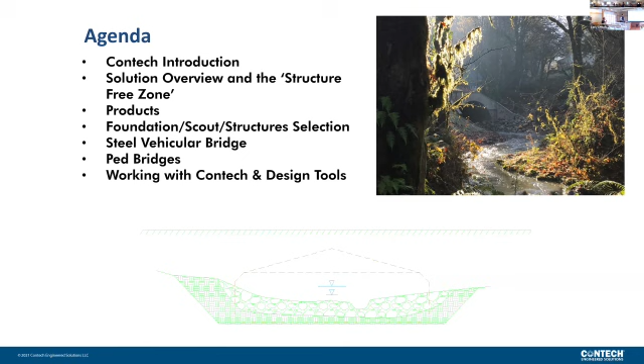All right, so structure free zone. Especially for Washington, for probably the last 10 years, we've really struggled. A lot of people do design-build, or a portion of it, but it's usually around a box culvert, a stream crossing, and it's up to manufacturer or contractor design. And so we really try to help hone in what that structure free zone looks like. How deep do we need to go for scour? Where do we need to put the foundations? How wide does it need to be for fish? Do we need some clearance for inspection, future maintenance?

So the more we can get that defined, then we can start looking at, okay, can we fit a plate structure in there? Or maybe it's precast. In this case, it's an arch. Maybe that's a precast three-sided structure. Or maybe a regular conventional concrete or steel girder beam span is the right option? I don't know. And a lot of people ask me, we were talking cost earlier.

I don't know until we really start looking at both the material costs of what Contech may supply or manufacturers, but then also what are the substructure, what are the foundation costs? And really that's the big picture that I try to pull together.

I do get a lot of emails from people: can you provide me a list of these 4 or 5 different costs, I just want to compare material costs? That's not the rest of the story. And that's why I encourage people to really look at the whole rest of the story, because just because it's the cheapest material, it's not always the cheapest constructed and also the long-term most cost-effective solution. Okay.

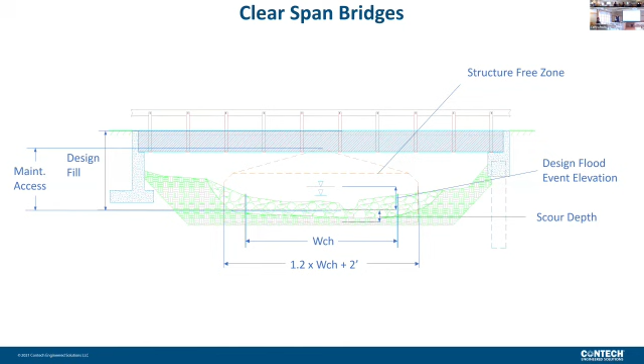So we do have at Contech a lot of different types of bridge structures, starting with small diameter culverts. We manufacture culverts for Washington up in Arlington, down in the Portland area, or over in Eastern Washington. We have material manufacturing all over the country. I'm really not gonna focus on those.

We'll really stick to what we call structural plate. I'll touch on the precast a little bit. And then I'll focus more on the beam span bridges. So I just tried to pick out what I think you guys are probably gonna look at most often. We're gonna look at a lot of huge DOT crossings. I'll show a few concepts as we go over. So we'll go back to that clearance box.

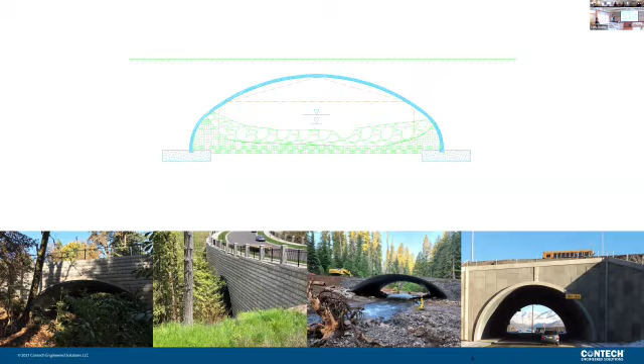So plate structures. Who's familiar, if I just say plate? Everybody familiar? Anybody not familiar with plate? Thank you. Perfect. I appreciate the honesty because it really helps knowing how fast I go or not.

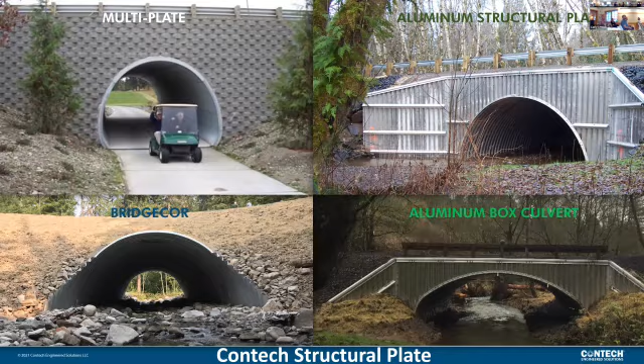So when we say structural plate, basically what we're talking about is the steel or aluminum plate structure that makes up a shape. So we have multi-plate, which is up on the upper left, aluminum structural plate, BridgeCor, and aluminum box culverts. A couple different products. So what are all those and how do we really decide what to use?

So probably the first thing that I hear a lot from a county or the city or a lot of the engineers: I can't do a steel structure, it doesn't last long enough. We're tearing out this old culvert that's corroded in the bottom. And I don't disagree, but a lot of those structures were probably installed 50 years ago and met the design intent at that time.

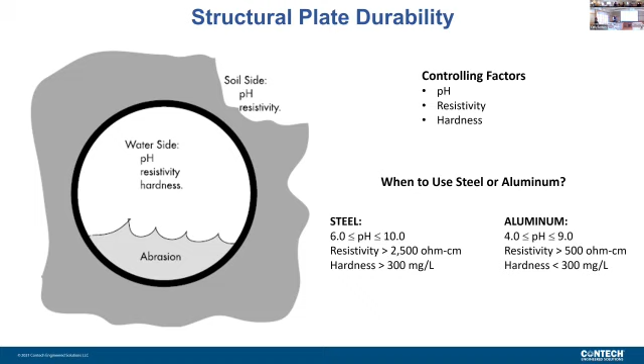And so one thing to consider is, back in the day, we typically would just install that culvert right in the bottom of the stream, we wouldn't countersink it or do anything. And then we have abrasion going through the invert. Once you lose the galvanizing on a steel structure, yes, it's going to corrode, especially when it's a very thin gauge material. I don't see that to be the problem anymore, because really what we're going to do is typically bury those structures.

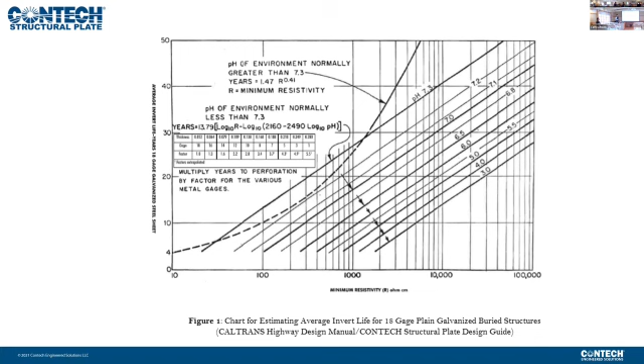But here's a great chart. This came out of Caltrans, and basically they inspected thousands and thousands of those galvanized steel culverts, smaller diameters, and put together this chart. You have resistivity on the bottom, and on this axis you have the pH. So if you go through that, let's just assume 28 years for this one. But that is for a thin gauge material.

And so what we do is we use this chart here to factor it up, because the lowest gauge that we make is a 12 gauge structure for structural plate. And in this case, you can say, instead of going 12, I'll go 10 or 8, and then you can increase that service life.

So my big takeaway to engineers is, let's understand our site, let's understand the materials and design it appropriately. And I think that's what we can really show for a lot of the sites within Washington. If we don't have hot soils, we can show a galvanized structure will last 75 years. Typically 75 years is what WSDOT, any of the state agencies, we need to design to as engineers. Does that make sense?

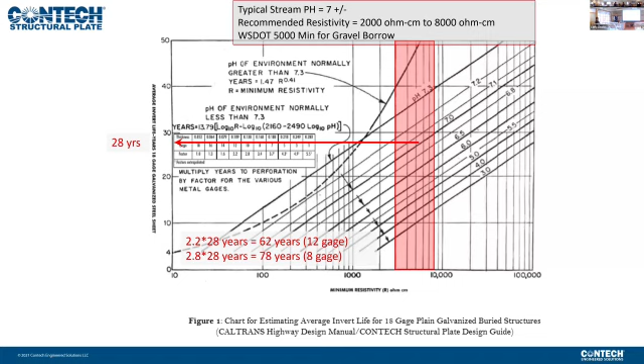The other option is we could go to an aluminum structure. Aluminum structures just have a broader pH and resistivity range from a durability standpoint. And so this chart here shows what we were just looking at, but in more detail: what are those thicknesses? So you see how this goes thicker and thicker.

So we can really get some material that is very thick, from a durability standpoint. So I'm gonna start passing this around. So this is what we call BridgeCor, and this is galvanized steel. What a lot of people used to be familiar with was multiplate, which has been around for about 100 years, and that is the 6x2 corrugation here, both of them galvanized steel.

And then the BridgeCor is 15 by 5.5. It's really the difference of those two. I kind of relate it to building a deck at your house. If that deck needs to span 4 feet, we might be able to use a 2x4 to span that distance, but if we need a deck that's going to span 10 feet, we're going to use a 2x8 or a 2x10. It's just a much deeper material, so we can span much further.

Okay. So I think that's probably the biggest takeaway that I've had over the last 10 years: BridgeCor has really opened the opportunities to different shapes, much larger spans, deeper fills as we do more and more of these stream crossings.

Okay, the other option would be going to aluminum structural plate, and that's a 2.5 corrugation. What's really cool about aluminum structural plate is it's very lightweight. So these are aluminum bolts, and then there's a steel bolt. Now, typically, we don't supply aluminum bolts with aluminum plate. It's not that we can't, it's just for AASHTO, it's not a requirement. So if you have a project where it is, I would make sure it's very clear in the specifications.

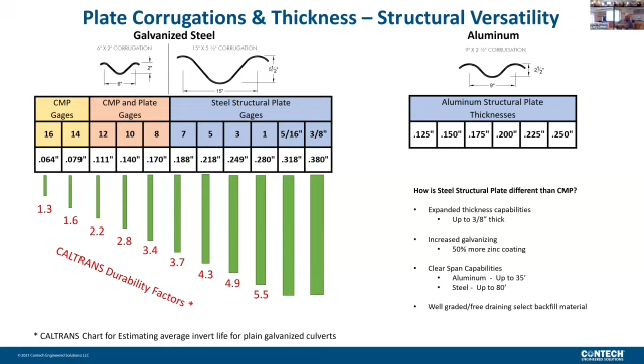Okay. We have a ton of different shapes, I shouldn't say we, but the industry. A lot of people are familiar with what's called the structural plate design guide. In the front of it, this basically summarizes the tables in AASHTO, so that engineers like us can go in there and go, okay, what's my span, what's my rise? Is there a structure that can meet the requirements of a road? So if you guys don't have one of these, let me know. I have a couple copies, but I can also email the PDF.

And so why do we have all these different shapes out in the industry? Anybody? Clearance box. Look back to that clearance box, and either it's a clearance box or it's a wide span, but I don't have a whole lot of fill height, so I'm gonna go to a culvert shape. Or maybe I have a lot of fill height, and I need to go to a single radius arch because I need to be able to carry that load. I couldn't carry that on this really flat structure with a lot of cover, okay?

This one here actually fits in AREMA, and AREMA is for railroad, so we can drive a train through this one. For structure-free zone, that's a lot of what we do in the industry, and that's the first thing I look at when people ask me. I go, well, what's the distance from your stream to the road, how wide is it, and how deep do I need to make that? Okay, and then we start looking at different shapes.

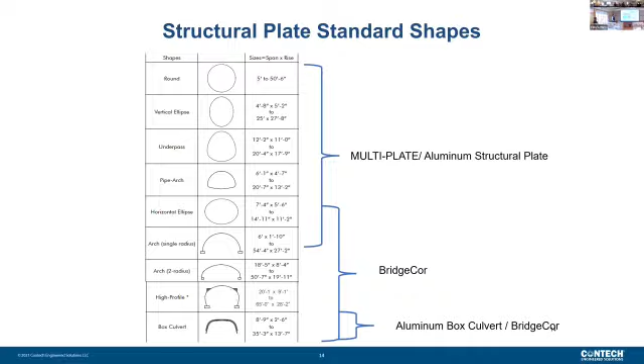Okay, so why do we a lot of times use different structural plates? A lot of times it's lightweight and easy to construct. The majority of the time, we don't need a crane out on a job site, it can be done with lightweight equipment. If it's aluminum structural plate, I can actually pick up some of our smaller aluminum structural plates. So if I can do it, most of the contractors out there can easily pick them up.

Some of the end treatments that we see, these are one of the bigger things that I started seeing on your guys' projects: what's happening at the end of the structure and what's most cost effective for that site and simplest for the contractors. Are we doing a structure that's up in the woods? Or is this down in the city? Those are the different things that we need to think about.

So up here, this one's for Mason County, this is aluminum structural plate headwall and wing walls. We can also do those out of steel. On the right would be a beveled end section with a cast-in-place concrete collar. I usually encourage that we try to stay away from cast-in-place if we can.

What I would rather see is almost that structure extended out. From our perspective it doesn't matter, but from the contractors and the questions I get about trying to cast concrete up and around structures, if we can just square end that structure, it's more cost effective. But there are safety reasons and other reasons why you might want to do a slope collar or bring in more line.

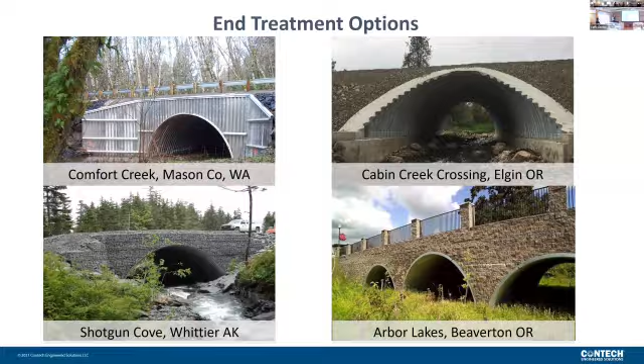The other option is going to some type of wire-basket wall or just doing a precast keystone block wall or something like that to keep that structure short. All right, so I'll flip through these pretty quick to show the different structural shapes and the different designs that were done.

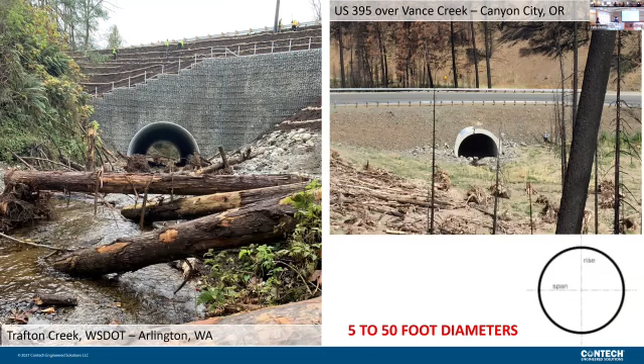So again, this one's a 26-foot round structure that we did for Washington. What's unique about that one versus a precast is it's more cost effective, but it also handles almost 50 feet of cover. That's what we're seeing on a lot of these projects. Ten years ago, we did all the easy ones. Now we're getting into harder and more costly crossings, and we really have to look at what we're doing and how, and it does cost more.

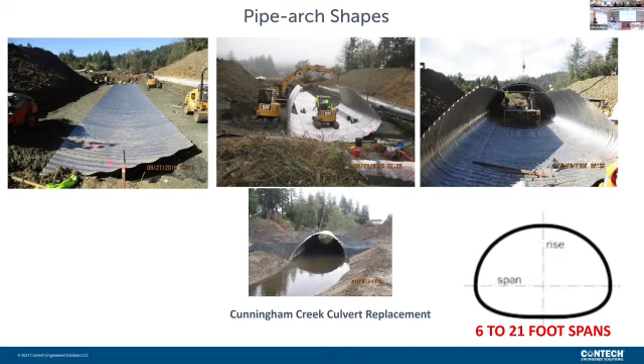I also really like the pipe arch. Great shape. We're not excavating too far, but still backfilling that structure, with that fish rock on the inside. The other one I see more often, I know these are just regular pedestrian crossings, these could be animal crossings. But when we go to this underpass shape, what I really like is the ability to get equipment in there and build that stream.

So I really encourage you as engineers, from what I've seen with contractors, the more room they can have, yes, the structure might cost a little more, but if they can get hydraulic equipment in there, it's way easier to build that stream. And ultimately, who's going to be maintaining the stream in 20 years? If something gets caught in there, can you get that woody debris out, does it pass through or not? If you need to do maintenance, having that equipment access matters.

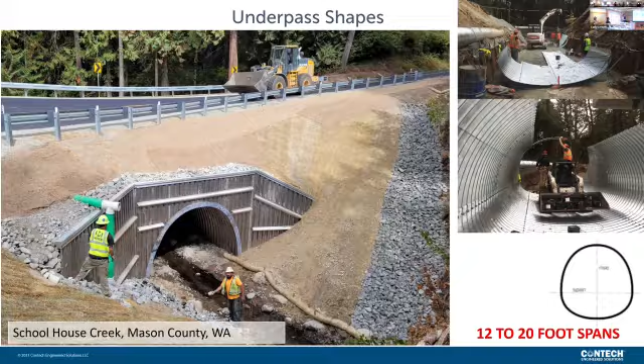Regular box culverts, we can do these out of aluminum or steel. If we're struggling with the distance from the stream to the road, a box culvert fits great to get that long span. But typically, especially the aluminum box culverts, they can only handle 5 feet of fill to meet AASHTO. We can design it for more fill, but AASHTO's requirement is no more than 5 feet. We can also go to the galvanized steel BridgeCor, and then we can handle more cover. But that's where I go: if we have more cover, let's change to a more structurally efficient shape.

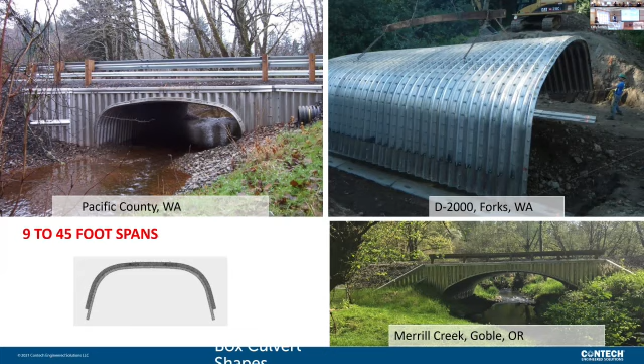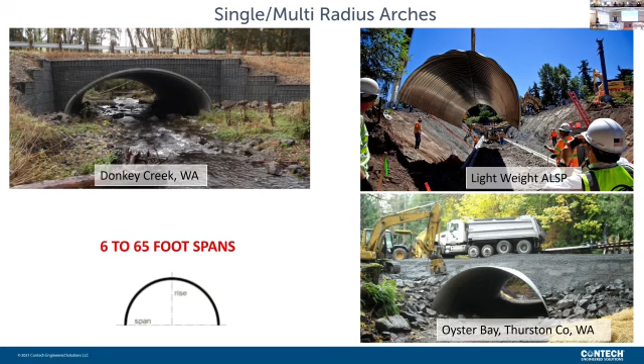Single radius arches. This is a multi-radius. You were asking me earlier, can we do different radius type arches? We definitely can. We'll do a single radius, which is the two on the right, or multi-radius, which just means here's one radius and there's another radius. We can do three radiuses if we need to. So I'll show you a couple different shapes. This is one for Washington.

The other thing I look at is, just because it's not in this book doesn't mean we can't do it. For example, this structure we're looking at right here does not show up in this book. The biggest span in here is a 23-foot span. This one's a 28-foot span. So that's where you just contact us.

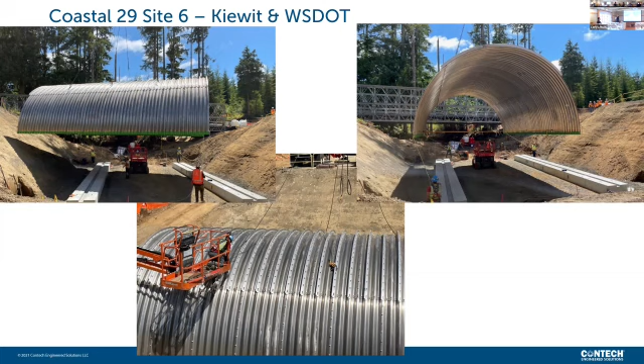If you said, can we do a 60-foot span? Maybe that's getting outside of the realm. But this is where we have that clearance box and know the project requirements, and we can say, here are the different options. So this is the end structure there. And if we take that, next year we're going to do a 42-foot span.

So in Contech, I almost double the span of what's in this book. But we're engaging, us as engineers, you guys as engineers, and we're modeling it and making sure it works structurally. And then it's cost effective.

The one there on the right, originally for WSDOT, that's a precast structure. Contractor, this is way out on the peninsula. Let's try to save some money, try and get the cranes out there, cast in place concrete, everything gets covered up wherever we get from the cities. Okay. And we've done a couple of plate structures with them, and so that's where they really said, hey, can we make an aluminum structural plate work? We think it's far more cost effective.

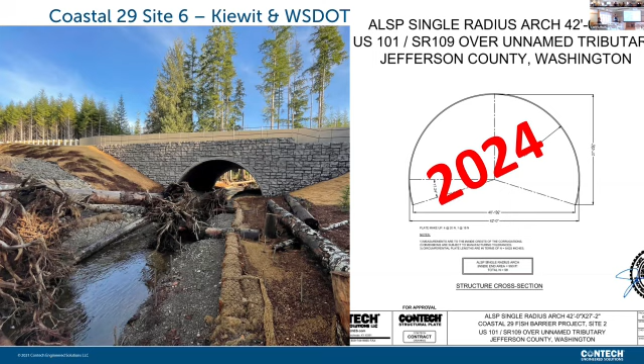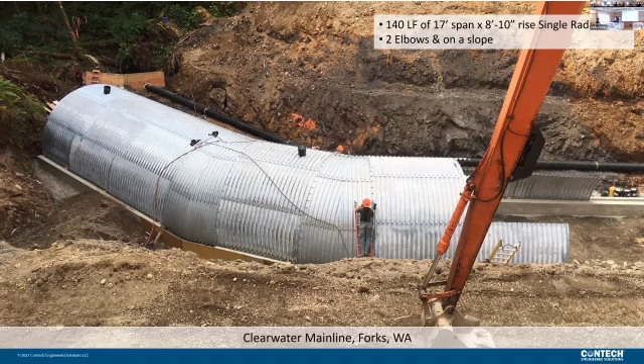Okay. The other thing that's great about some of the structural plate is being able to do elbows. So this is one job out by Forks, but being able to follow that stream, and so we already have an existing culvert, maybe there's an elbow in it. Instead of straightening this out, making it much wider, more cost effective, really follow that stream. Obviously when you see your rock, it makes it harder and harder to excavate through that rock.

And this again was my picture too that I talked about earlier. We get that hydraulic equipment in. Let's try to make it, even if your structure free zone is only 3 feet tall, if you have that room, let's make that structure much bigger so you can get equipment in there.

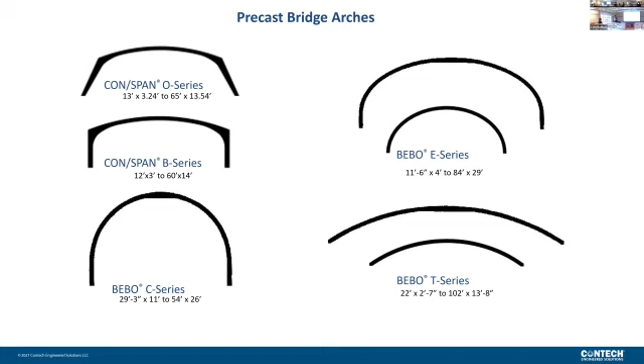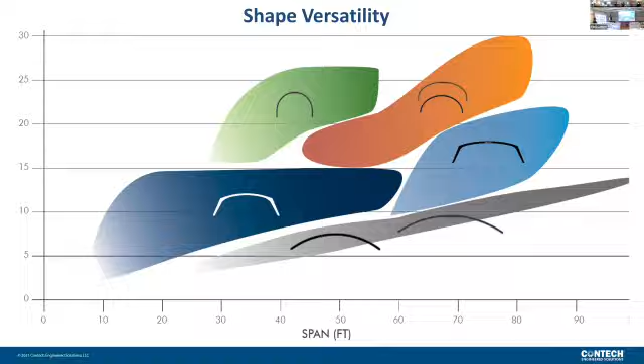All right, so we'll switch gears and we'll talk quickly about precast, just a couple different options. So within what Contech does for precast, here's pretty much our spans going from 12 foot all the way to realistically 84 feet. So just like structural plate, you can see all these different shapes and different colors, different clearance boxes or different kinds of cover. That's why we have all these different shapes to try to fit these different sites that you guys make us see.

Okay. What's nice, just like on the aluminum structural plate or plate, we can do head walls, wing walls, and this shows a precast arch with large precast wing walls, large head walls that are attached to the structure. Sometimes we're looking at these pre-manufactured solutions because you guys are trying to design something that's going to be built in a week, 2 weeks. We're not sitting out there trying to cast concrete. If you go down to California or other areas where you have all this time, we don't have the fish window. So we're trying to do what's the speed of construction, build these as quick as you can.

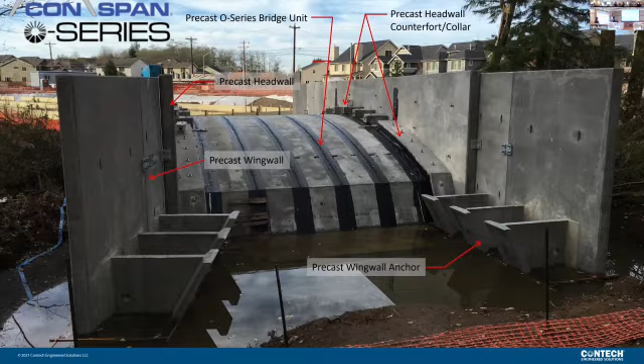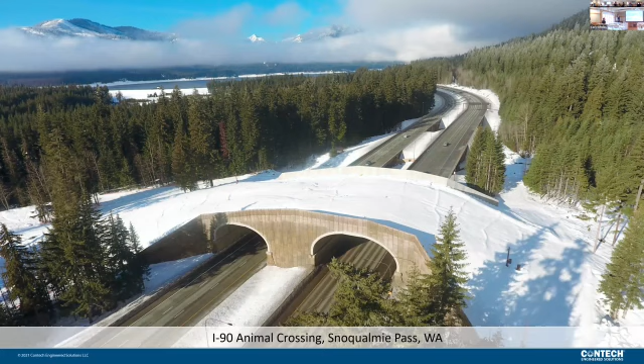Here's one that I did a couple years ago. I just want to show this, I get asked a lot: can we do pile foundations? Yes, we can put these structures on pile foundations, but to me, it's kind of a red flag. Let's make sure we're designing the structure appropriately. Geotech, we're doing these big buried structures. It might not be the right solution. Maybe we should go into a girder bridge if we're burying the structure. Just because of the dead load of the earth around it, it might not always be the most cost effective. So let's really think about that first.

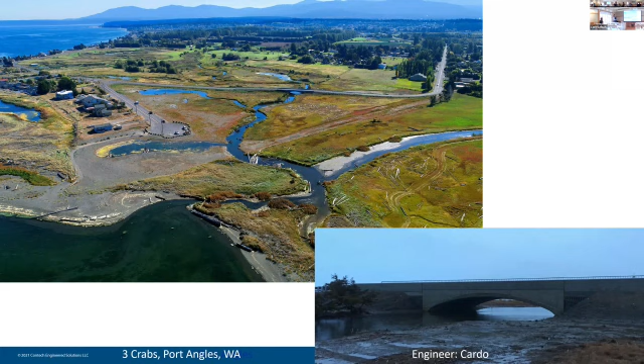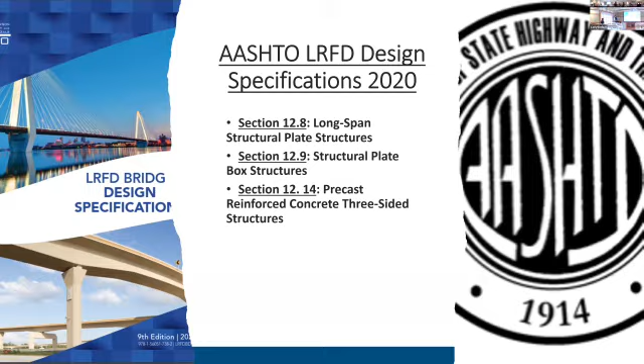But that was a great project. I mean, opened up a huge excavated area. It was very successful from that standpoint. Just making sure we understand the cost a little bit. So design specifications, I'll go through this real quick, but all these structures we're designing to AASHTO, be it a precast structure or plate structure. It's this soil structure interaction. So also something to really think about too.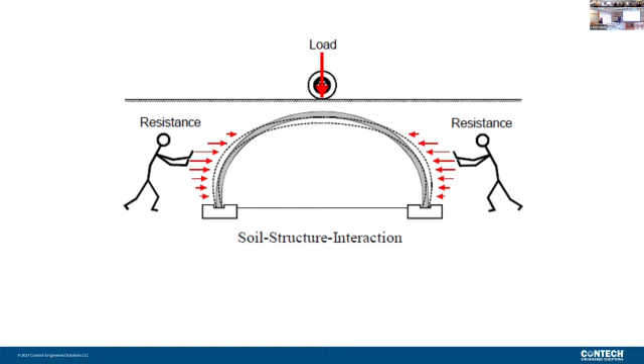When this goes out to bid and is in construction, we at Contech want to make sure that contractor is building these correctly and the backfill is being done. That's probably the biggest thing when we start seeing problems: the backfill wasn't done appropriately. Either the contractor didn't have the right material or it wasn't specified correctly. And especially as we get longer and longer spans, we want to make sure that material is supporting these arches. Okay. We use a program called CANDE, and that stands for Culvert Analysis and Design, an FHWA program.

It's not proprietary. You guys can download it. I have a couple structural engineers here in the Northwest that we try to help understand the program, because more and more bridge engineers, I was one at the time, weren't very familiar with doing any buried structures. So how do we start designing it? And so more and more people are kind of learning or trying to understand how to do that.

So if you have anybody, we're more than happy to give a quick hour or two hour of CANDE. Here's how it works. Here's how we use it.

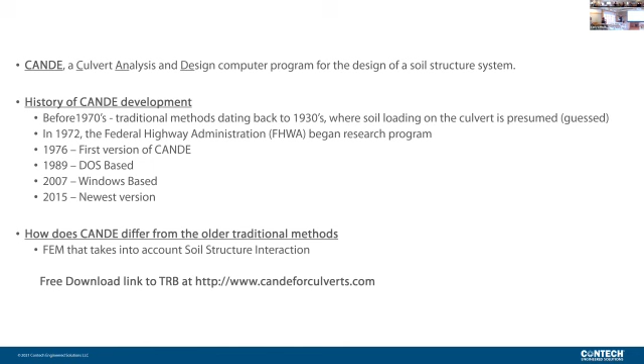Okay. So basically what CANDE is, if you're not a structural engineer, or I should ask, does anybody know finite element? Okay. So what finite element basically is, as an engineer, we take all these little tiny different nodes and we can assign them different material properties. So obviously the ones in color are assigned the same material properties. Then we can put a load on the top and each of those little pieces will distribute that load throughout the soil or throughout the structure.

And so for AASHTO, this is what we need to do when we start getting these longer span structures. So some people ask me, why, when we go to these bigger structures, does it take more time? Because we're having to do this analysis in the background. It's no longer just pull it out of a catalog. So, I guess any questions on that?

I know it's quick, but the other one would be seismic, to address seismic for buried structures. So we use that program and we basically take the structure and rack it. So we push it over for the earthquake, check all the loads in it, make sure that it can stay there, and that's how we check it. So if anybody wants more on that one, just let me know. I've got plenty more slides and I'm happy to talk on that.

Sir, do you guys provide the specs and the contract materials? We do, yeah. Just make sure we know about it. There are some things geotechnically that some of the geotechs are not giving, like information in the soil report. So they need to know that it is expected, so that they provide that. But yeah, that is different.

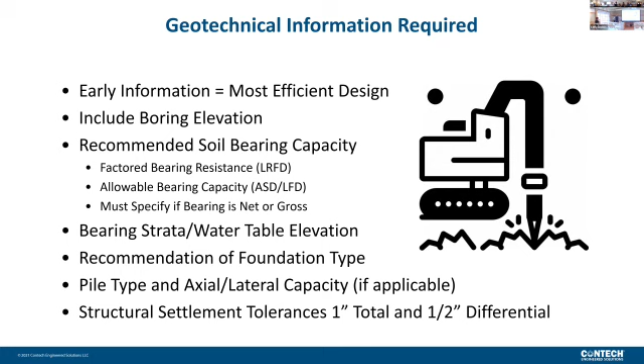So within Contech, we really try to encourage landowners, whoever the owner is, to get geotechnical information. I personally don't think it's cost effective to do it later. Because if you're a contractor, am I going to build a footing this big or is it this big? And that matters. And usually the cost of the foundation is more than doing the geotech report. So if we don't have that information, most people are going to assume conservative numbers, which as an engineer, conservative usually means bigger and more costly. So that's my quick two cents on foundation design.

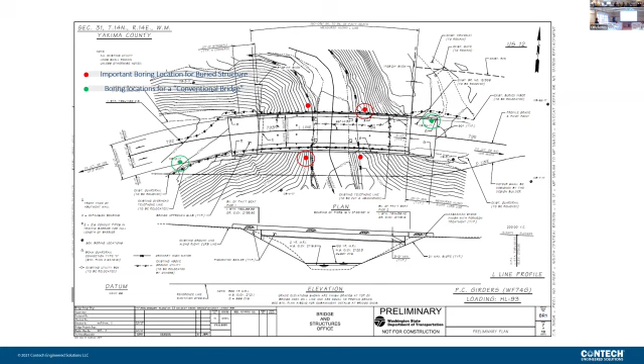So the other thing that I encourage, this is a WSDOT job I'll show later, but it was a design build, and they provided geotechnical information. Being a design build, it's usually the most cost effective structure that meets the design intent. Two of the contractors did a buried structure, right here, but we had no geotechnical information. We had to assume that at bid time. And so it makes it really tough, whether we're being too conservative or not conservative enough. So the more information we can get, the better.

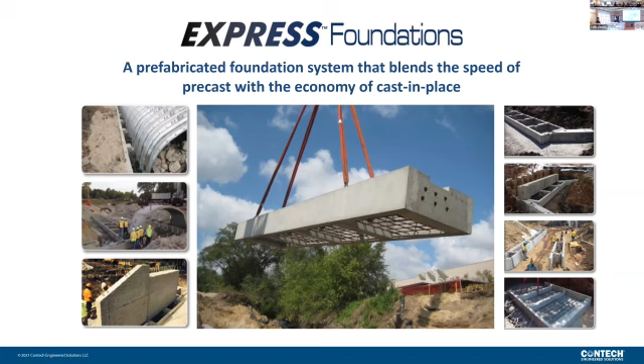So from a foundation standpoint, we do have what's called Express Foundation. This is one of the products, I think probably the only one I'll talk about, that is proprietary from Contech. I'll go through it, and if this is something you guys want to use or give as an option to an engineer or a contractor, we can talk about ways you can write a spec and leave it up to the contractor to decide which one's most cost effective.

So really what express foundations are: that previous one was precast, this one was plate, basically a precast or a plate form with all the rebar already installed in it, except for wherever we would have a longitudinal splice. So this one's going to butt up to the next one, and we're going to have some tie rebar across it. I like this from a foundation standpoint, instead of doing solid precast, because we have continuity in the foundations, okay? If we ever have settling, seismic, or scour, we have a continuous foundation versus just butting it up.

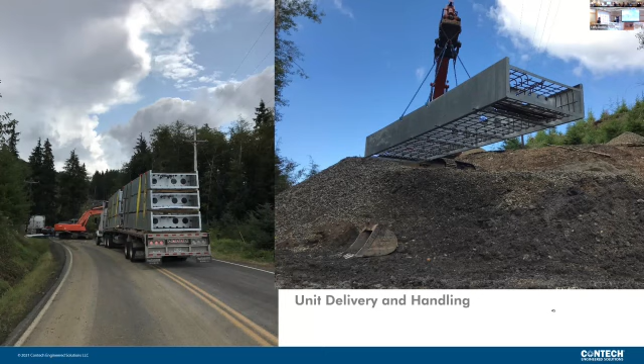There's a couple of them going in, like Mason County; we're doing two for Mason County this year. I think from their standpoint, the county likes it because their crews go out and install this and you're just filling with concrete. You don't have to, you know, be really savvy. You don't have the whole cost of the forming. So it's just an option out there if you guys want to look at that for some of your projects.

Okay, so scour. We kind of talked about the structure free zone, and this is probably a big one that I'm seeing, especially with a lot of these WSDOT projects. Scour on some sites is not 2 feet. We're seeing sites with 4 feet, 6 feet, 8, 10 feet of scour, and so really knowing that at the 30% design phase, being aware that it really can affect your structure and what you choose. Because I see a lot of times we'll get into these projects at that 30%.

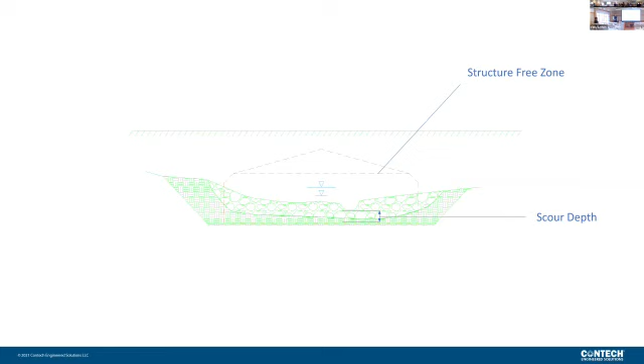And we're kind of doing this huge design and we're spending a lot of time really refining costs. But until we really know that, those costs will change and the structure overall will change a lot. So just something to think about, or make sure we're assuming something that's maybe conservative to start with.

A couple of different products that we do support. I'm not going to talk a whole lot about these, but Armor Flex is one of them. The nice thing about Armor Flex is it's an engineered product for embankments; you can put it underneath a structure, it can be vegetated, you can put fish rock on top of it. But it's a design material, so we know what shear stress that material can take before failure.

Okay. The other option, this is a job for Lewis County, is called A-Jacks. So this is just armoring a bridge abutment. They were having problems with scouring underneath the bridge and were dumping a bunch of rock every year. Some of these products we can get to stand steeper than your typical armor, so that we can open up that channel and decrease the flow a little bit. So it kind of helps twofold there.

Okay. So now I'm going to kind of switch gears. How are we doing on time? How much time do we have, if you don't mind? 14 more minutes. 14 more minutes. Okay.

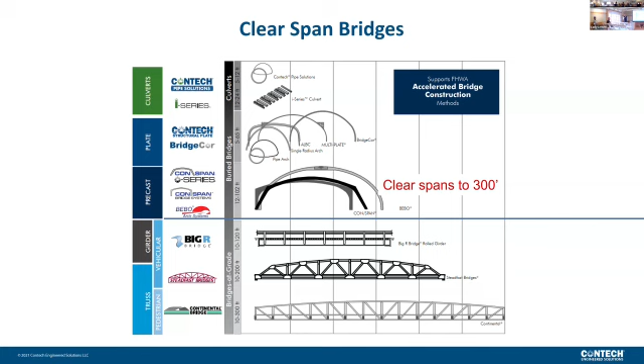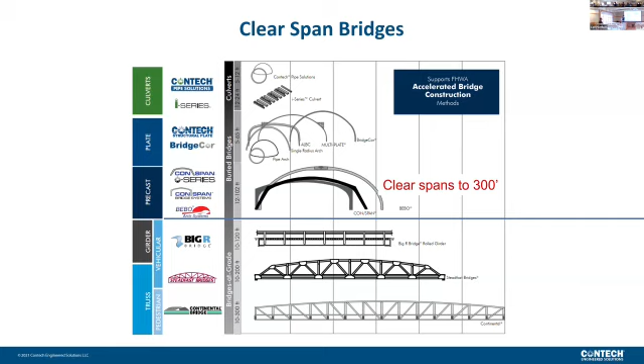And we're going to hit our regular question: why are we designing steel beam span structures? We're going to be below this line here and looking at why a steel bridge; very similar to plate, lightweight, cost effective is why we're looking at some of these. I put this together, it's kind of cool, with 8 steps to choosing a particular bridge. So I'll go through these really quick, if you guys want this presentation later.

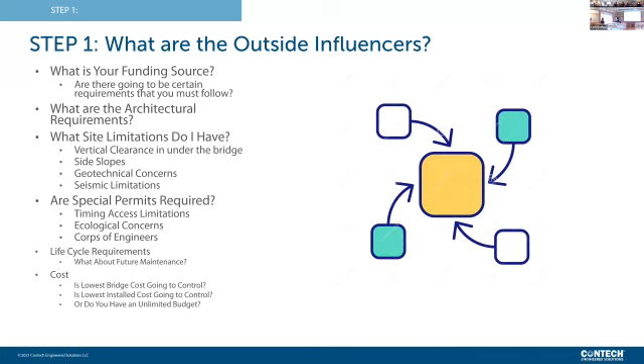But it's really, what are the outside influencers? Who's influencing? Is it private funding, public funding? What is that funding source? Are there any architectural requirements? What's the site layout, permit requirements? Does the structure only need to last 10 years, or are we designing something for 75 years?

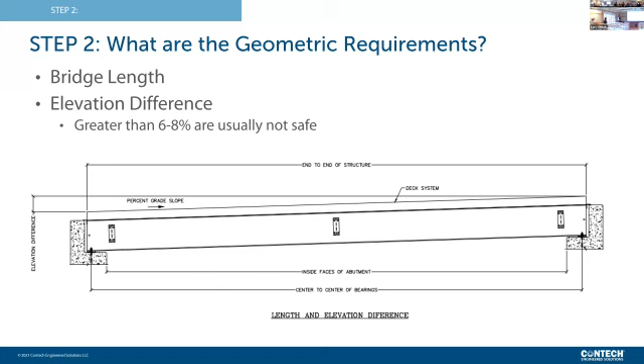What about foundations? What are we doing from the foundation standpoint? And what are the different site constraints? Where's it being built? Kind of thinking about that. What are the geometry requirements? Do we put the bridge on a slope going in the direction of traffic, or is there a cross slope on it? Kind of thinking through what the requirements are.

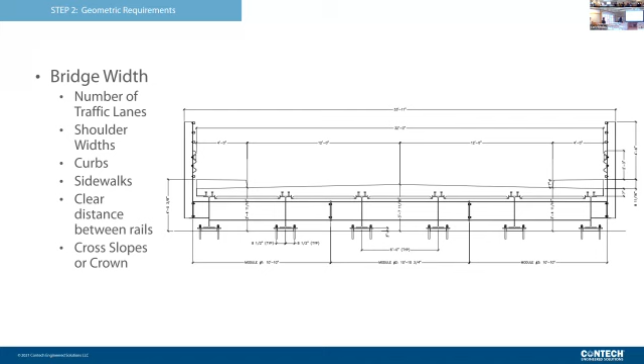The width of the bridge: for a lot of these beam span style bridges, usually here in the Northwest, we'll build them in modules, okay? Very cost effective, but understanding: is this a 14-foot road for private residents, or is it 16-foot, maybe a logging road, or is it 24 feet because we need a 2-lane county road? So understanding those requirements.

Do we have a skew at the end of the bridge? Or maybe it's a horizontal curve; especially for some of these, we're trying to put a bridge on a horizontal curve, so maybe the bridge needs to be a little wider so we continue that curve on the bridge.

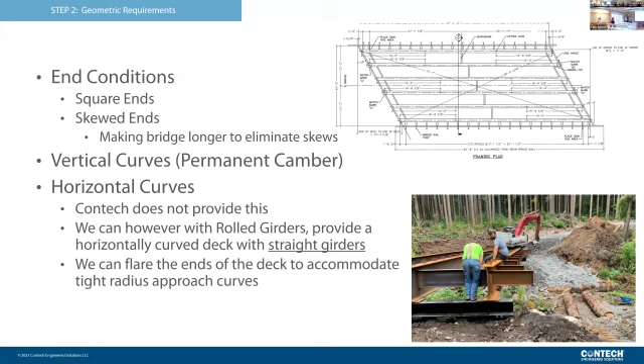So what types of steel should we use? Or excuse me, what types of bridge? I kind of mentioned this earlier, do we look at a pedestrian bridge? And some people kind of go, why would we do a pedestrian bridge for vehicular access? One, sometimes it's going to be more cost effective, a different style. Some people, if you're doing this for a private residence, maybe they would rather see a pedestrian bridge going into their property. When I say pedestrian though, it's still designed for vehicular loads. It's just that's not the main load.

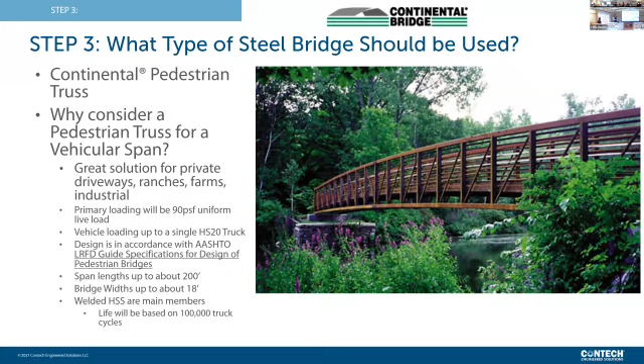And when we look at AASHTO and we design a bridge and we say it's a bridge, that's a bridge that's like on I-5, where we've got continuous truck traffic, and that's how we're designing it. If we go to a different code within AASHTO, we can design it for pedestrians with occasional or overload, but not regular traffic, like a semi-truck. So just something to think about from a cost-effective standpoint as you're working with people.

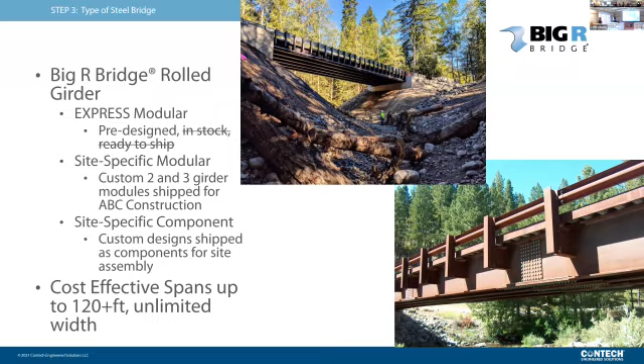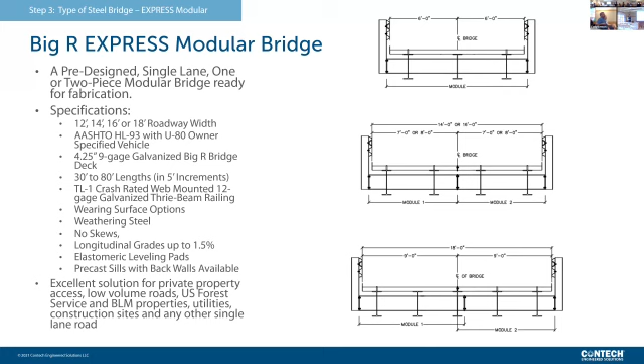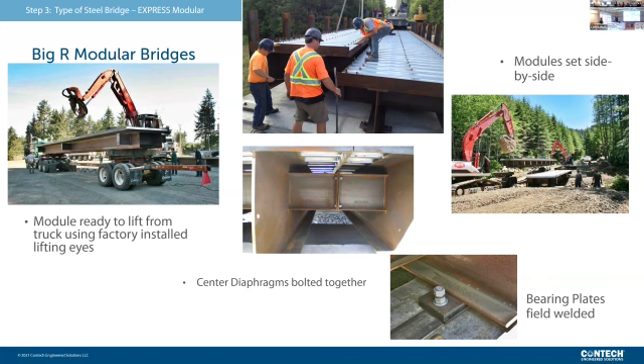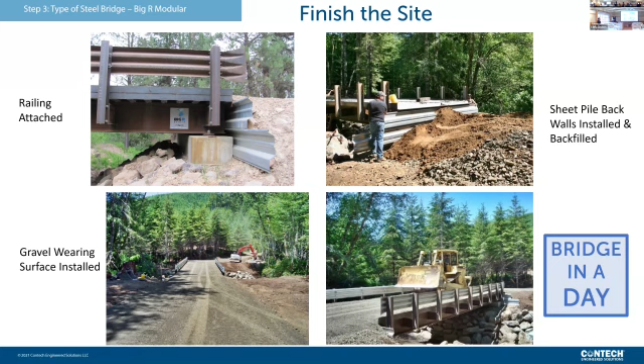If you guys haven't seen them, this is why a lot of people do these: on the next slides, it's like a bridge in a day, where you're getting these bridge components that come out, and you pick them up with an excavator or a log handler. Some people use a small crane and just set them in place. So you set the abutments, set the back wall, set your bridge in place, and put your gravel on it. You're really getting a bridge in a day, maybe 2 days, depending on how long it takes you to put in the foundations.

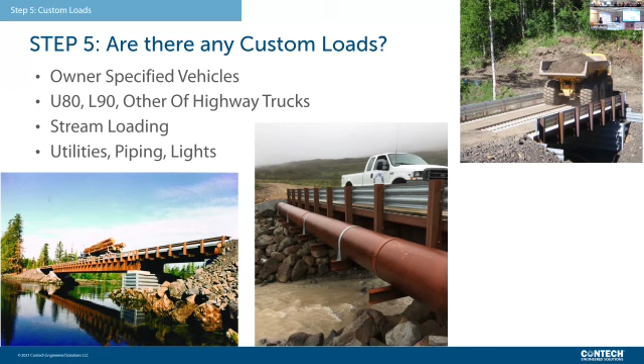All right, we need to design for custom loads. Is there something special out there for the site? U80 loading is pretty typical for us in the Northwest. It's your regular yarder that you typically get in logging. So if that goes across the bridge, we need to know about it. Please make sure that's in the specifications. Sometimes with these larger loads, though, specify them as an overload, so we're not designing them to the regular AASHTO parameters, and that'll save some money for you. Okay.

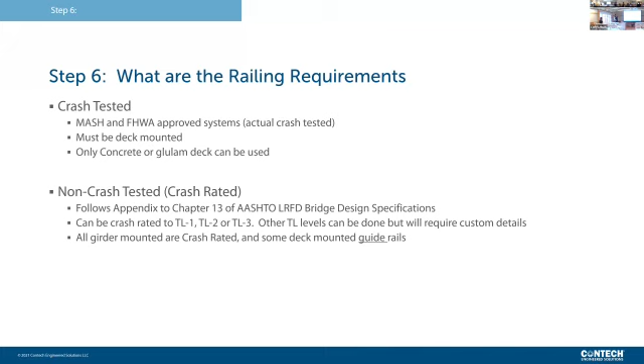Railing requirements, I'll go through this pretty quick, but there's either crash tested or non-crash tested. Most of the time we are doing non-crash tested rail, meaning we're designing for the load on the bridge, but it has not been tested for AASHTO. Okay. And I would say a lot of the bridges you see out there are that, non-rated.

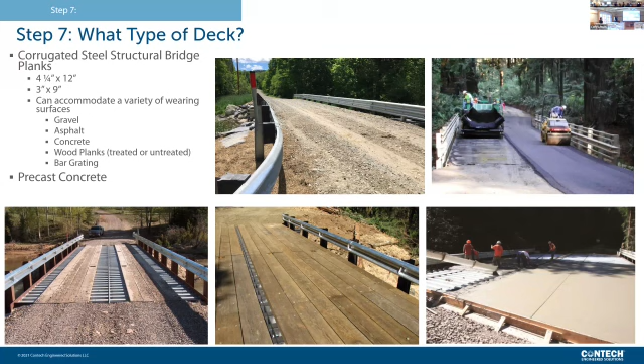So here's a couple of the different deck types that we can use, gravel to asphalt. A lot of times we'll see this one where it'll just be the steel deck pans, and they put a running surface down, very cost effective. Or maybe it's a county road and they want to do a cast-in-place deck, as you see on the lower right. All different deck types that we can design around. Almost done here, so bearing surfaces. I kind of doubt you guys will ever see isolation bearings, but typically it's just a thin elastomeric bearing pad.

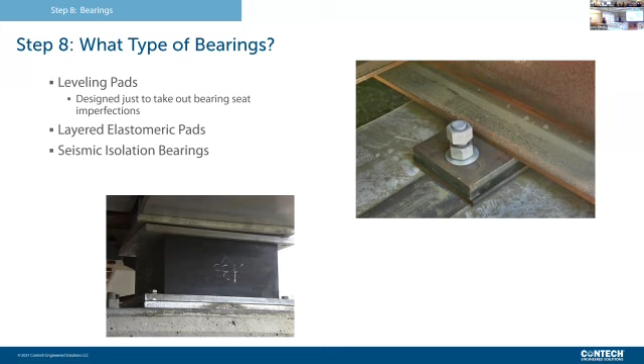But we can also design and specify an elastomeric bearing pad as well. Okay, I know that was pretty quick. Any quick questions on the beam span? Kind of design options, any of that? Okay. All right, so there's a quick summary of those 8 steps, and I'll give this to you guys if anybody wants them. Look at a couple different pictures.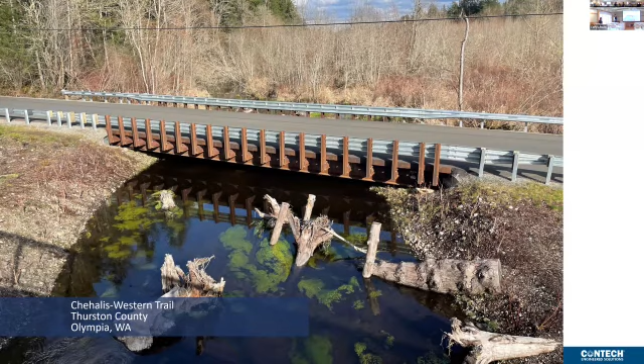All right, so how are we doing on time? We're talking about 6 more minutes, is that until 9 o'clock? 9:50, or I'm sorry, 8:50. Awesome. Okay. Yeah, so you're doing fine.

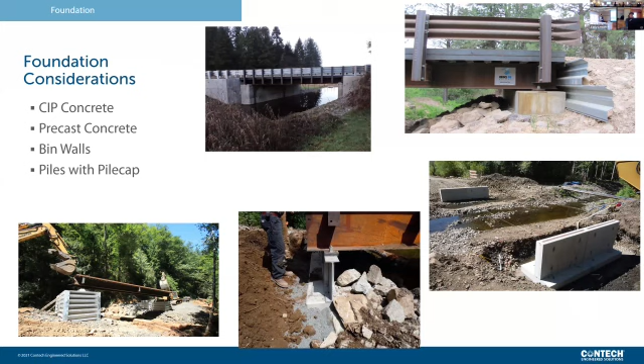With Q&A, all right. So foundations, so very similar to plate structures. Let's think about these foundations, what options are out there. What things to consider. Can we do deep foundations? Absolutely, you can do deep foundations, kind of the upper right. So like for beam spans, a lot of times then we'll see a steel pile cap put on top of them, or it could be a precast pile cap, or it could be cast in place, and then set the girders right on top of that.

One thing nice about doing the steel pile cap, this mesh here, it's nice that there's some adjustability. You can kind of put those beams and things are off a couple inches here or there, and then we just weld the setting plates on top of those. Where that was precast, then it makes it a little bit tighter. You don't have to move around much.

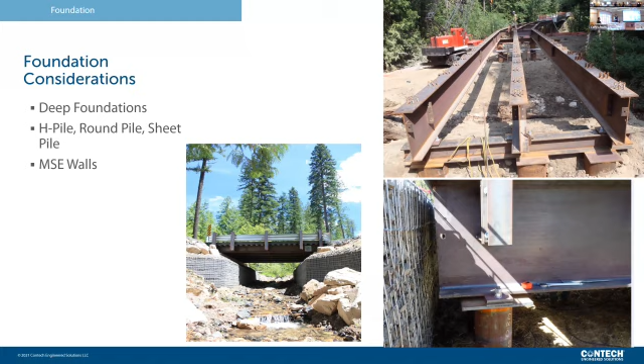But I think this is a good slide for kind of thinking through. Well, do you do a short bridge or do you do a long bridge? Well, what are the site requirements? Those foundations are the big part. Like in that upper right, do a little short bridge. Is that more cost effective versus doing those huge walls and everything else?

I don't know. So we gotta kind of do that quick cost analysis of type size. On that one, it seems like making that bridge twice as long would have been a little more cost effective, and tapering up those slopes. But maybe there was some site constraints or something else that people were concerned about. So just kind of thinking through that and what are the right options.

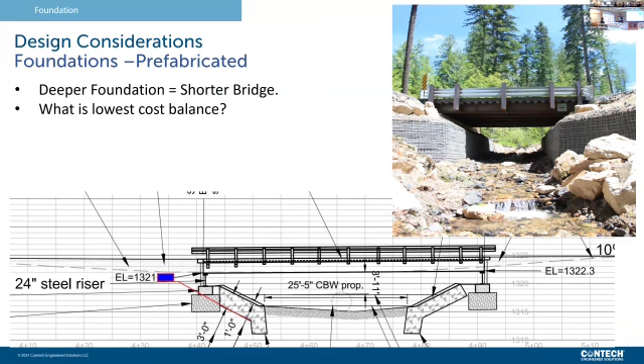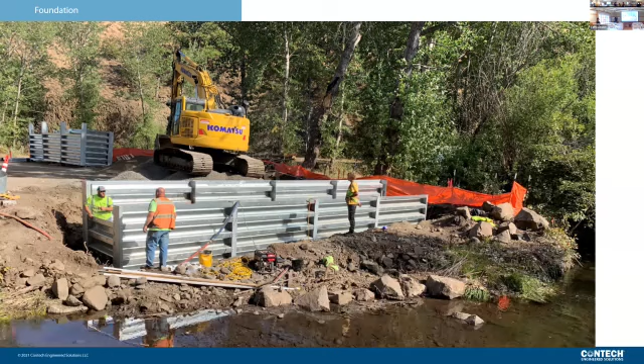Like you take this site here, this guy was standing in water, so they're setting those bins in, prepare the subgrade as much as you can, set those bins in, and then those bins you fill up with gravel. If that was a cast in place abutment, it's quite a different process to really do that right. So just kind of showing you some examples of different things that could be done.

So working with Contech, how can we help you guys look through these different options? And it gets back to your talking earlier, what's the cost? If I get a cost, how do I figure that out? I found this design tool really helpful for engineers.

It doesn't have all of our structures in there. We're slowly adding them as we get design developed. But like this one, it's great, you can kind of put in what width, what length of the bridge, and even if it doesn't have the option, you can at least go through it and then let us know: hey, it doesn't have the width of the bridge I need, but here's the concept, let me get it going.

So, when I was doing consulting, it's nice if you're doing the type, size, and location report. Maybe you got 4 or 8 pages describing your site and what options, and then in the back, here's your appendix with some drawings and concepts. But it takes you 5 minutes to generate this, and that's what I try to look at for you guys: how do you do things faster and faster, or less time-consuming for you?

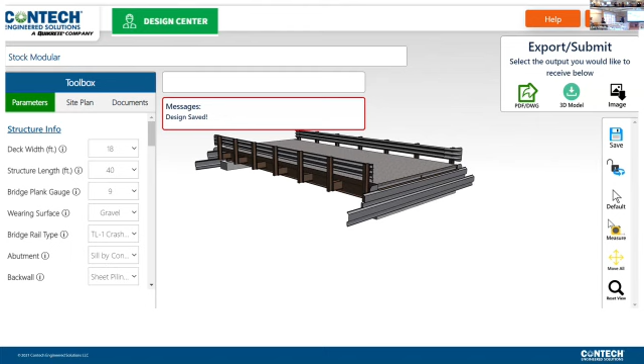So once you enter that information, within probably about 5 or 10 minutes, you'll get an email that'll kind of show you the plan view, cross sections. So in this option here, here's your plan view, your cross sections, loading for your abutment, so you can do preliminary abutment design. So these are some of the tools that we're trying to help speed things up for engineers that are designing around these structures.

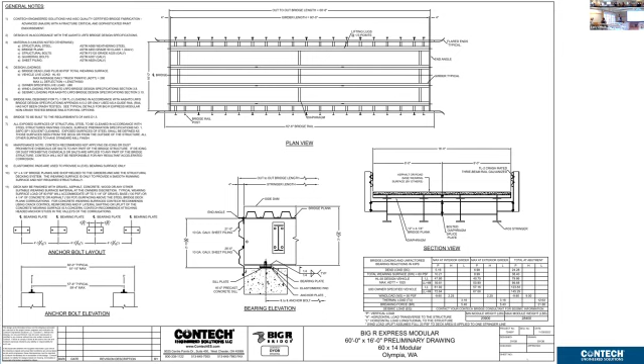We do those for our buried structures. Our buried structures are not going to give you reactions. There's a lot more that goes into them, 2-foot of cover or 20-foot of cover. We don't have that automation yet. But what's cool is you put in your different clearance boxes, so it's an animal crossing, all different things, could be a plate structure.

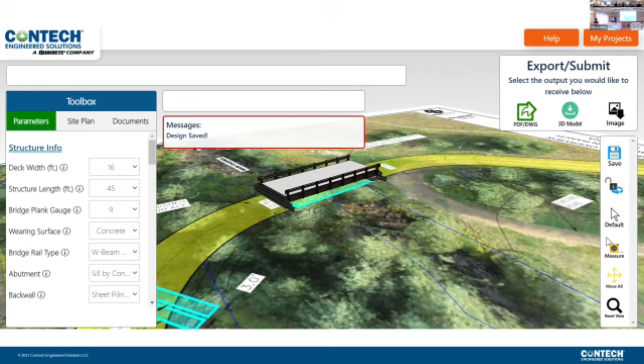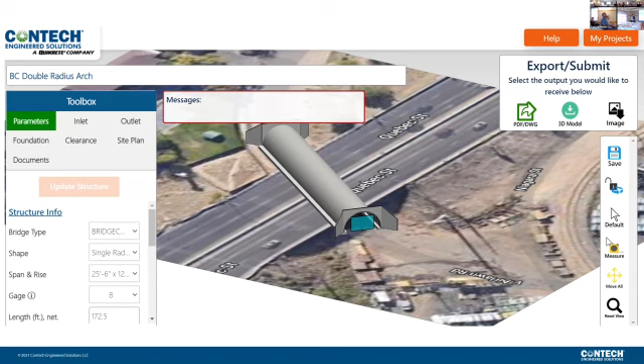And also there's an option in there where you can pull in a photo or Google Earth map and kind of put that structure in. So it's great, maybe if you're meeting with a landowner. Okay, here's kind of the concept. Here's a photo of your site or a drone shot. Maybe you have some plans and you're dropping it in there. Obviously, this one looks a little different because the structure will be under the road, but doing the best we can with some automation and making it look somewhat realistic.

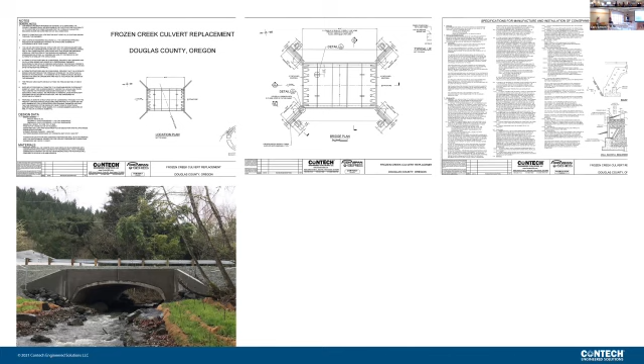We can then help you guys generate actual drawings. We can sign and stamp drawings for you, pre-bid. So we need to discuss if we're going to do that, design for our own structures, or we can do it at just post-bid. So different options out there. Just get a hold of us and we can kind of look through different things.

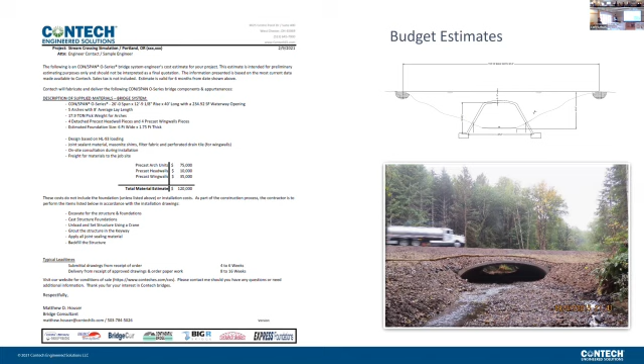The other one that we started generating is installation costs. And currently, we only are doing this for our precast and plate buried structures. But again, if this is the material cost of that previous example, what's our foundation cost? What's the install or labor? What's excavation, backfill? Here's just kind of a list of materials to start thinking about.

It's not just your material cost, but the overall cost, be it drill shafts or piles or shoring, a lot of things that we're not involved with, but at least it kind of helps you guys think about it and what it costs. We don't always have exact cost per square yard of material, but just help us. If you go, hey, for my site, it's $45, we'll plug that in for you. Okay, so that's something we can help with.